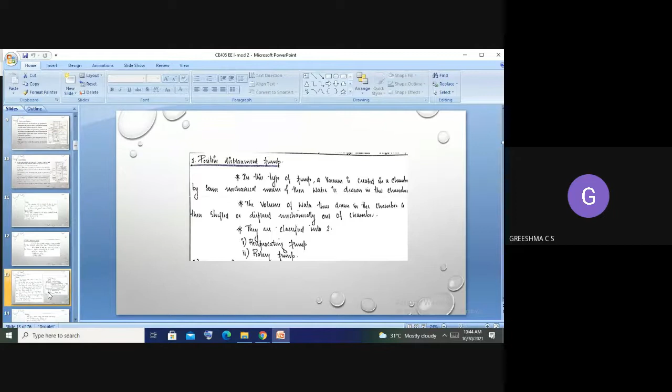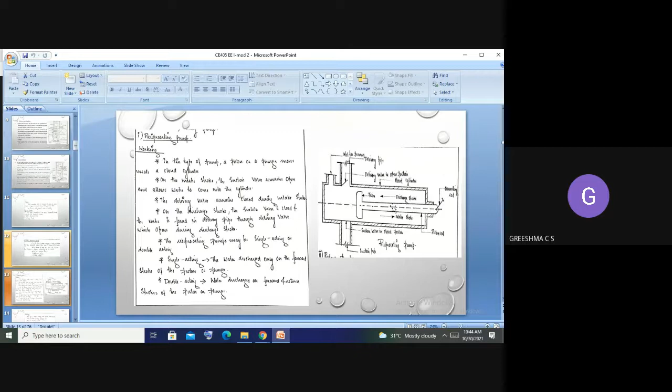Reciprocating pump, yesterday I showed you with the video how it is - a closed cylinder will be there, a plunger will be there. This plunger will be rotating, and by this rotation or movement the water will be passing through the cylinder. So that is reciprocating pump.

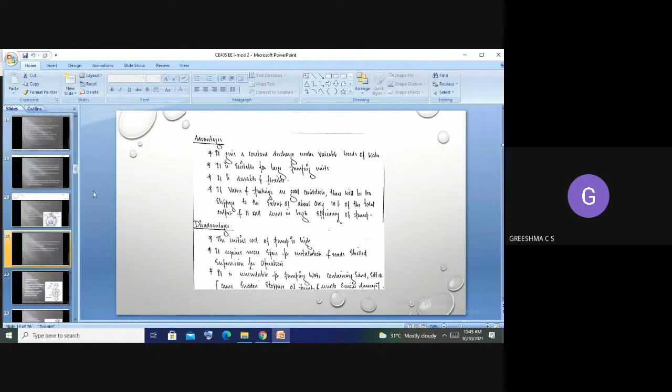After that I showed you the rotary pump. Rotary pump means you are having rotary blades, and these blades will be moving in opposite directions. You can see in this figure, the blades will be there moving in opposite directions, so water will be passing through between the teeth of these blades, and it will go to the discharge pipe. So that is rotary pumps.

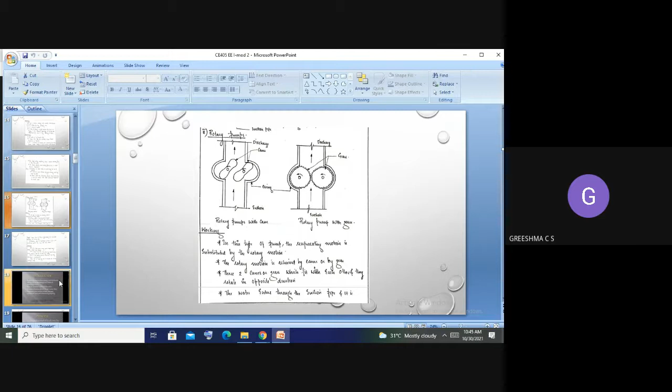Coming to the next category, that is centrifugal pumps. This you might have studied. So what do I mean by centrifugal pumps?

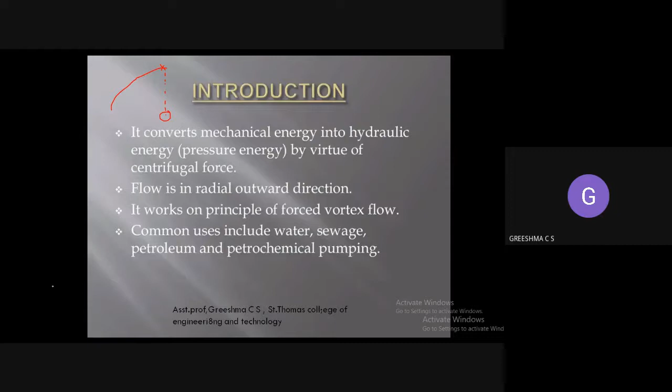As you're seeing right now, this is a centrifugal pump.

Now what's the principle of this centrifugal pump? The main principle is the forced vortex flow, which means that a certain mass of fluid is rotated by the external torque, and there will be a rise in the pressure head. What do you mean by forced vortex flow? It means a mass of fluid - imagine a liquid, I'll explain in simple terms - when the liquid is rotated with an external torque, there will be a rise in the pressure.

Due to this rise in pressure, the water will be flowing. This process is known as forced vortex flow.

This centrifugal pump mainly has two main parts: the impeller and the casing. The impeller converts the driver energy into kinetic energy, and the diffuser converts the kinetic energy into pressure energy.

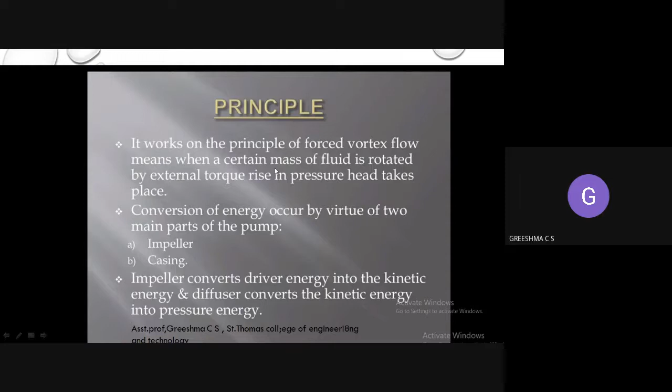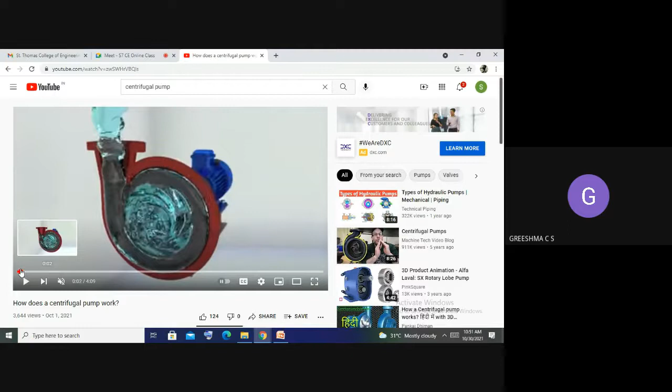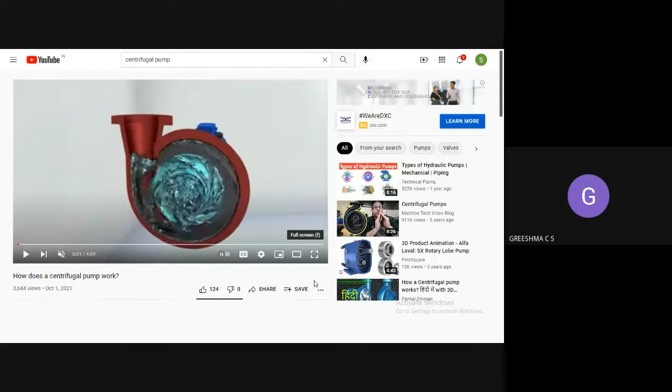So see this. Have you seen this? See. This is called the forced vortex flow.

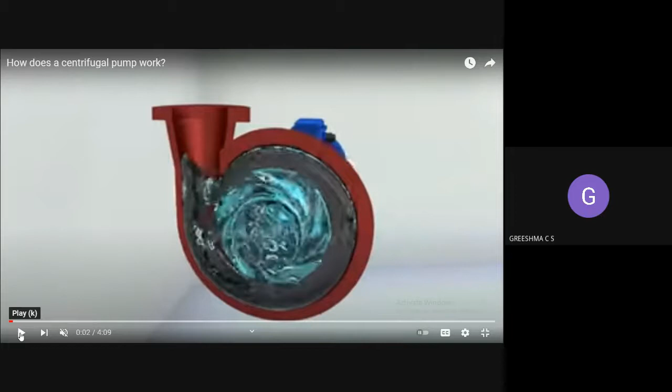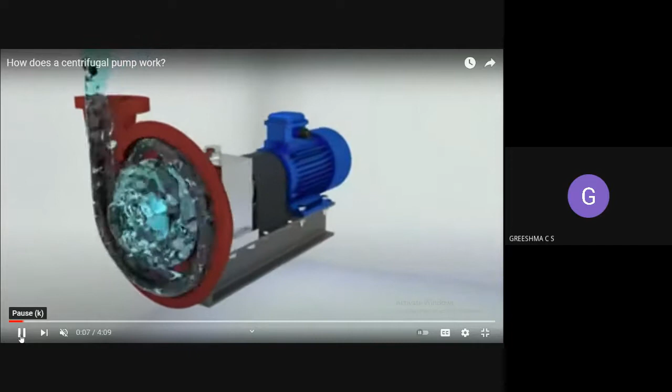As you can see, these are the vanes, which have plates, and water flows through these vanes. The water is rotated by the torque, external torque. You can see this in the video very clearly. This mass of liquid is rotated by the external torque.

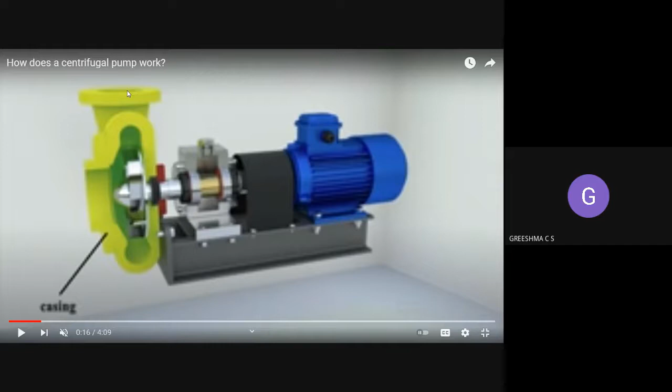When this external torque is acting on this mass of liquid, the pressure of the water will rise. Because of this pressure, the water will pass through the delivery pipe. This is the delivery pipe, as you can see here.

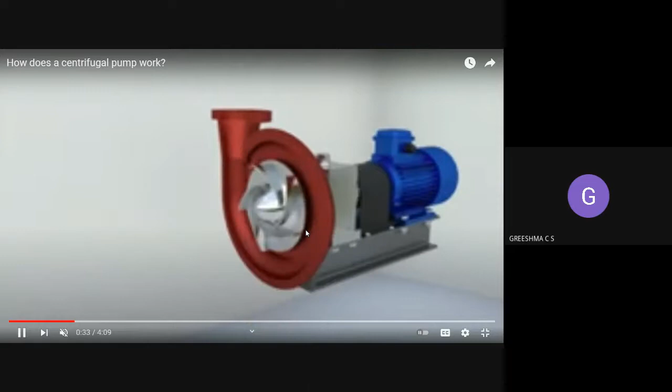So these are the parts of the centrifugal pump: this is the casing, this is the impeller, this is the shaft, this is the bearing. This is the exact picture of how the water is pumped through a centrifugal pump.

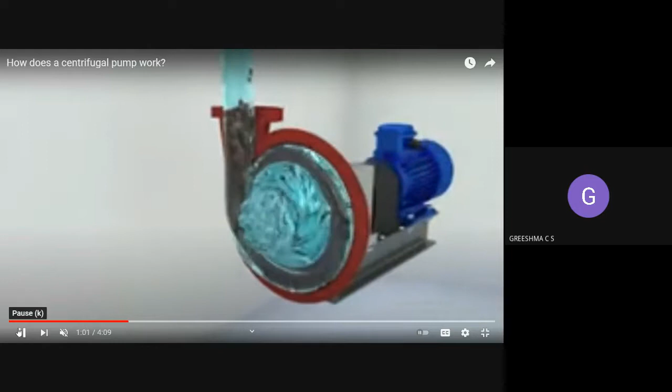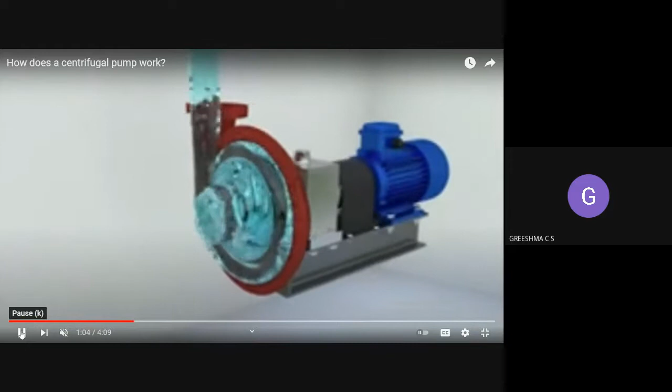Can you see this? Water will be allowed to pass through; there will be a pipe, a conduit over here. Water passes through this conduit, and here the impeller will be rotating, and water will be forced into this impeller.

The water is subjected to a centrifugal force as external torque is applied. You can see the water rotating. As the water rotates like this, the pressure energy of the water increases, and because of this pressure energy, water rises through the delivery pipe.

Okay, so that's about the centrifugal pump.

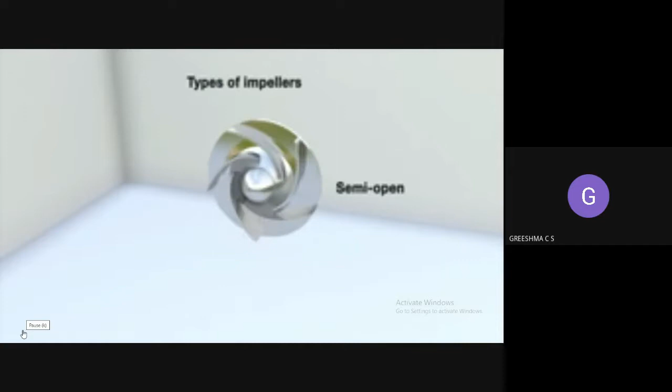See, it will be rotating like this. These vanes initially rotate like this, so water will pass through it, and then the water passes through this impeller, meaning water is subjected to a centrifugal force. The torque acts there, so the pressure energy of the water increases, and water passes through the delivery pipe. That's how it works.

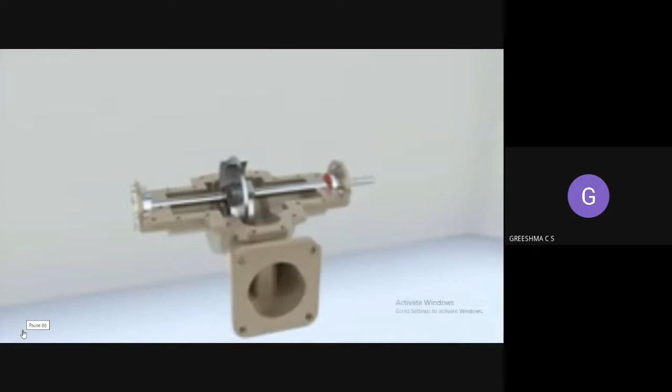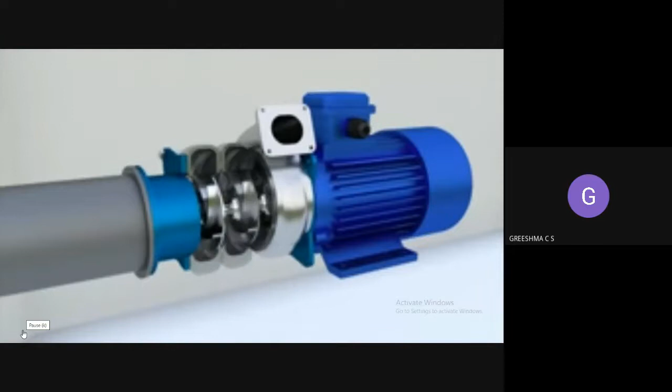See, this is the exact working of it. Here you can see the water is forced through here, passing through this pipe. The impeller is rotating, and this impeller forces the water through the delivery pipe. The water that comes to the delivery pipe will have high pressure energy.

See, this is how the centrifugal pump is pushing the water out. Okay, so through here water is coming.

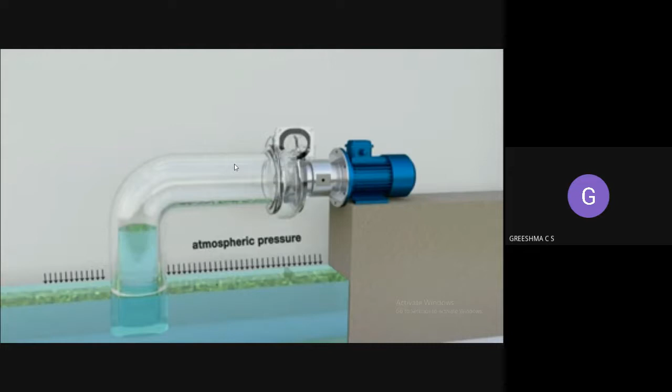So now we can go back to our slides.

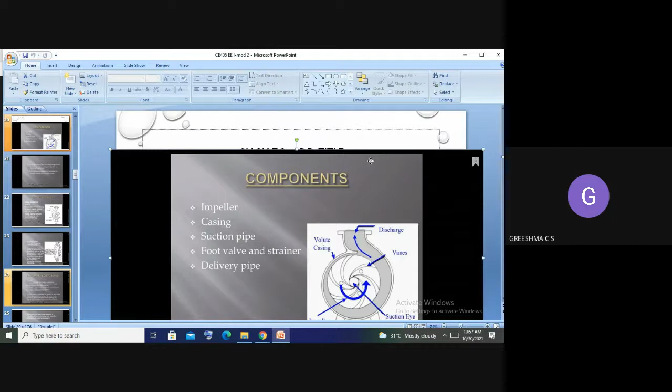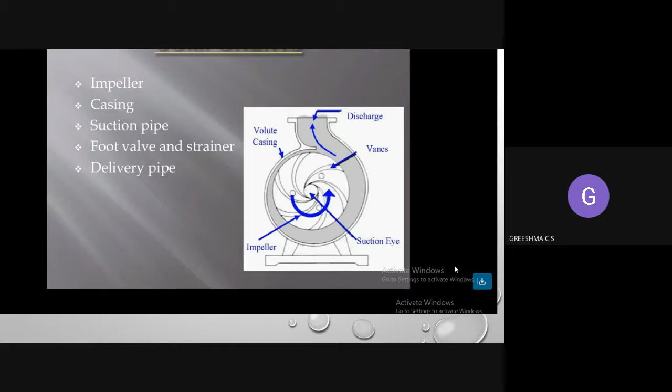Okay, so these are the different parts of the centrifugal pump. They will be having an impeller, a casing. Impeller is a rotating one, casing is the outer part, then a suction pipe - this is the pipe through which water is pumped, called a suction pipe. Then there will be a footvalve, a strainer, then a delivery pipe.

Now we have seen how the centrifugal pump is working. This is the cross section of the centrifugal pump - here is the inlet pipe, here is the outlet pipe. Water will be forced to the impeller through the inlet pipe, and the liquid will be rotating in the impeller, and then it will be going out to the outlet. So you have to draw this cross section if the question is asked.

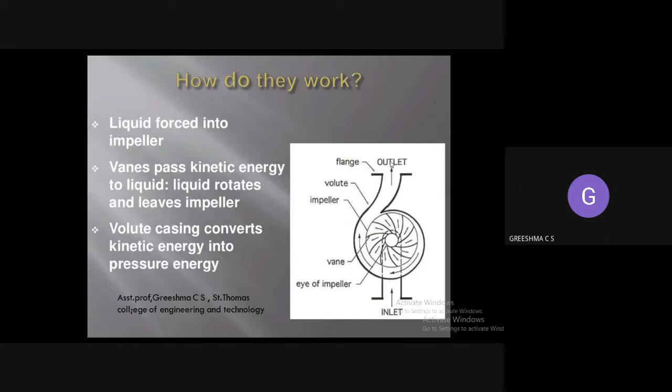Now coming to the casings - the main purpose of this casing is to convert kinetic energy into pressure energy. Casing means the outermost portion. You have seen in that video they showed you the maroon colored casing - that maroon color outermost box is called casing.

Now the casings are mainly of three types - volute casing, vortex casing, and circular casing. Volute casing is used for higher head, that is when the water has to be pumped to a very large height.

Now next one is the vortex casing. Here the eddy currents of the water will be reduced - that means the hydraulic energy of the water can be dissipated by the vortex. Water will be having a lot of hydraulic energy, eddy currents will be there, that is water will be pushing with hydraulic force. So that can be reduced using this vortex.

Next one is circular casing. Circular casings are used for lower height, that is when water needs to be pumped to a lower height. When water has to be pumped to a larger height, you can use volute casings. And if the water pressure energy is very high and eddy currents need to be reduced, in that case you can go for vortex casing.

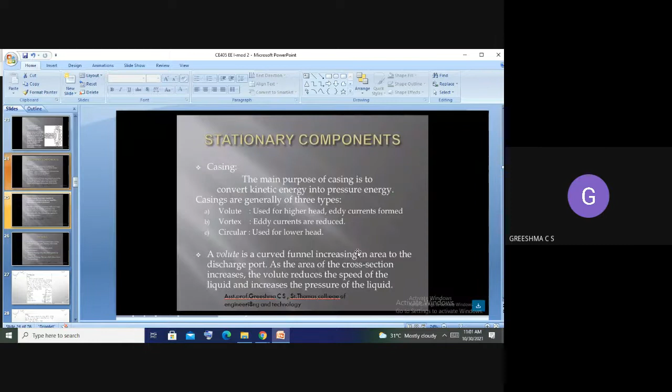Now coming to the different types of casing in detail. The first one is volute casing - it is mainly having a curved funnel shape which is increasing in area towards the discharging port. So as you go to the port, its area will be increasing.

As the area of the cross section increases, the volute reduces the speed of the liquid and increases the pressure of the liquid. So as the area of this discharge pipe increases, the speed of the liquid will be reduced, and the pressure energy of this water can be increased.

So what is the advantage of this? Water can be pumped to a greater height - a large amount of water can be pumped to a greater height if it has high pressure energy. In the volute casing, the area of the discharge port is large, so the speed of the liquid is reduced and pressure is increased, allowing the water to be pumped to greater heights.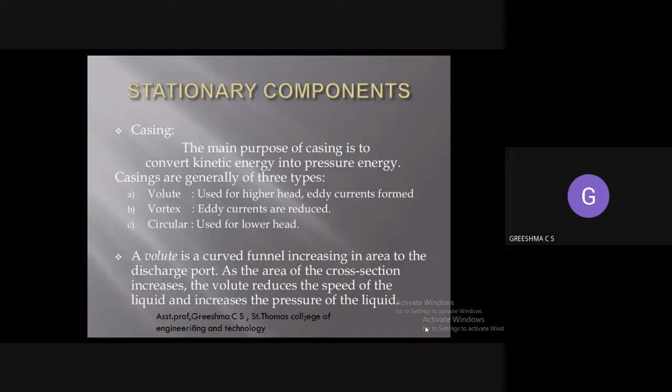Coming to the vortex casing - it has a circular chamber which is kept between the casing and the impeller. By this, you can increase the efficiency of the pump, mainly if you want to reduce the water currents or eddy currents.

If you want to reduce the eddy currents, you can go for vortex casing. Mainly vortex casing is not used for pumping water to larger heights, but here our aim is to improve the efficiency of the pump. That means a large amount of water can be pumped, and the efficiency of the pump can be increased. So that is the second case, vortex casing.

Coming to the third and last one, that is circular casing. This is a stationary diffuser vane that surrounds the impeller periphery, which converts the velocity to pressure energy. This circular casing basically has a circular shape.

This is kept surrounding the impeller of the pump. You have seen the impeller, the blade-like things, right? So it is kept over there. The circular casing surrounds the periphery of this impeller, and it converts velocity to pressure energy. Again, this is not used for larger heights or large projects.

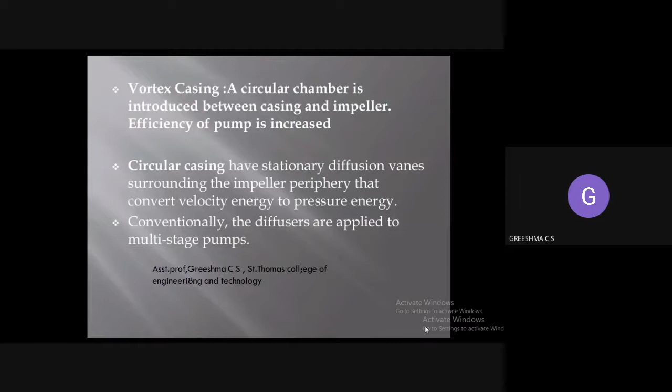Now another important term relating to the centrifugal pump is priming. So what do you mean by priming? Priming is nothing but filling the whole section with water.

It is the process of filling the suction pipe, casing, and delivery pipe up to the delivery valve with water. That means the suction pipe, casing, delivery pipe, everything is filled with water. That process is called priming.

Why you're doing it is mainly to remove the air content. In this video they have clearly shown you the priming process.

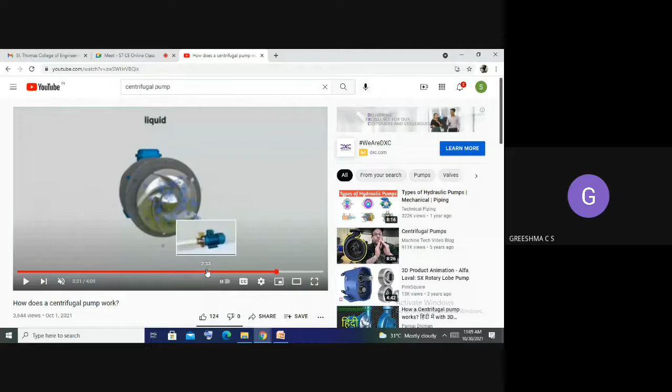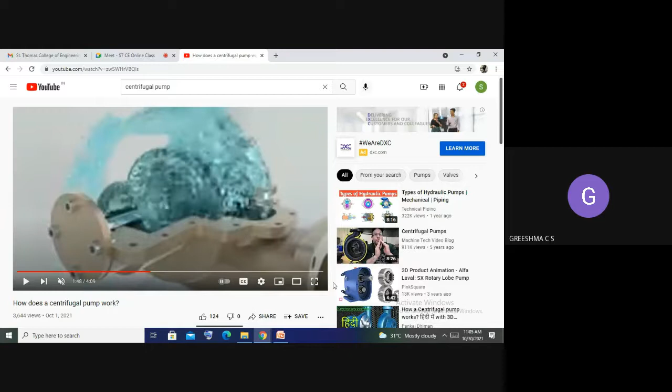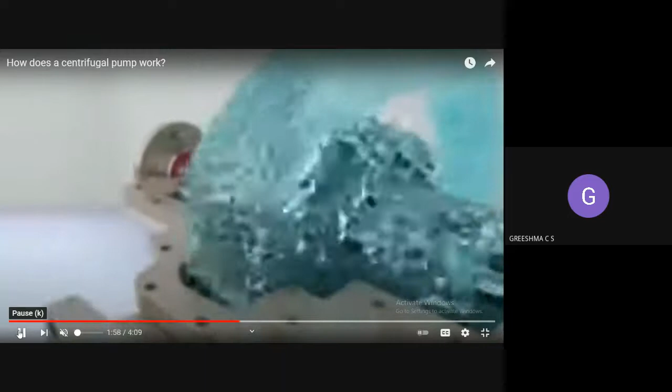See, this is the priming. Here you can see everything, the suction pipe, delivery valve, everything filled with water. The whole portion is filled with water. Can you see the suction pipe? That full chamber is filled with water.

The main advantage of this is that the air content can be reduced. If air is there, the efficiency of the pump will decrease. So the air content can be reduced, and that process is called priming. Again, I will show you one short clip of priming.

Here you can see priming. This is a suction pipe. Here the impeller is rotating, and because of that rotation, the water is suctioned inside.

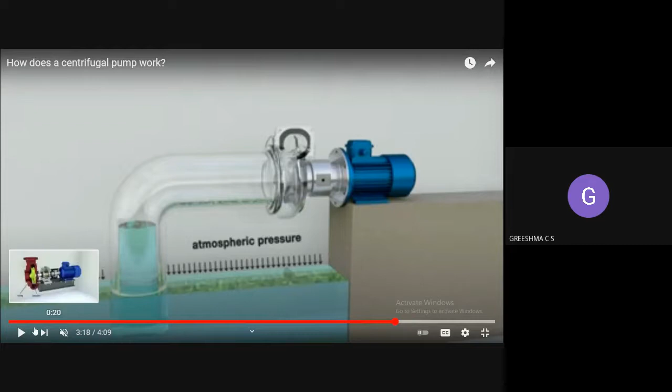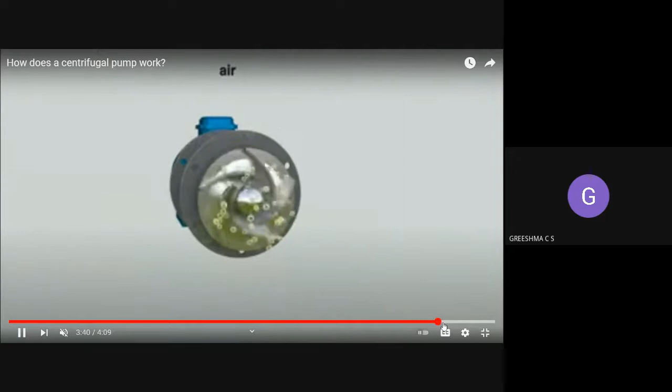See this, this is the exact picture of priming, how it is occurring. Everything from the suction pipe, through which water is entering by the action of suction, to the delivery valve, all these things are filled with water. This process is called priming.

Priming is one of the most important processes involved in the centrifugal pump. The main objective is to remove the air content, to improve efficiency by removing the air content.

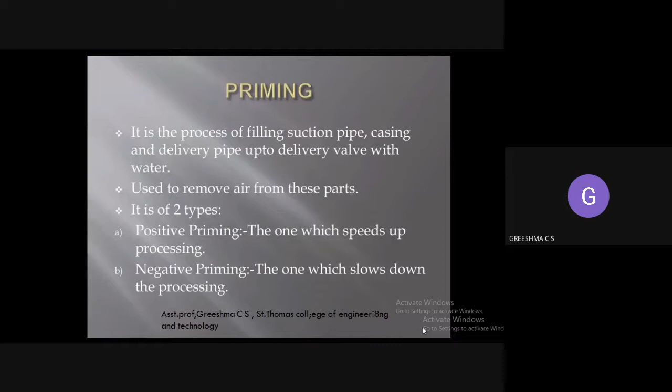Priming is mainly of two types: positive priming and negative priming. Positive priming means it speeds up the pumping process. If the priming reduces the process of pumping, it is called negative priming. Anyway, that portion is not much important to us; in priming, that term is important.

Okay, so that's about the centrifugal pump.

One of the disadvantages of the centrifugal pump is that when water is being pumped, if the pumping is suddenly stopped, the water will move in the backward direction. That's one of the main disadvantages of this centrifugal pump.

The remaining advantage is that it is very useful because you can pump water to different heights. So you should study this cross section, which is very important.

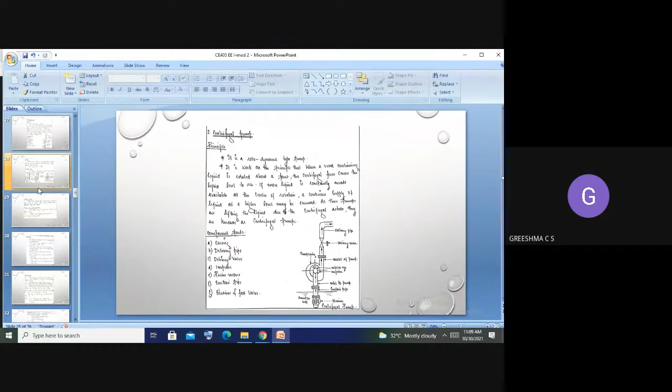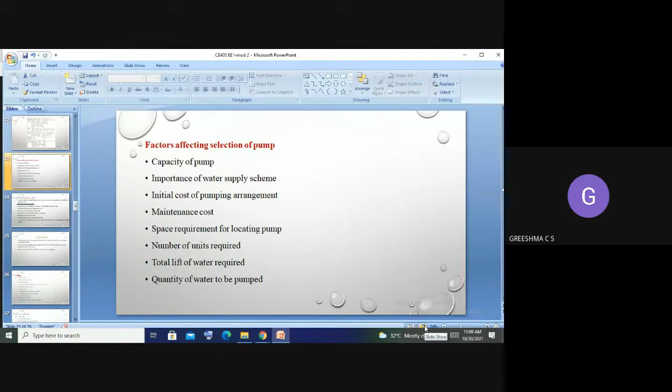Coming to the next portion, that is the factors which are affecting the selection of the pump.

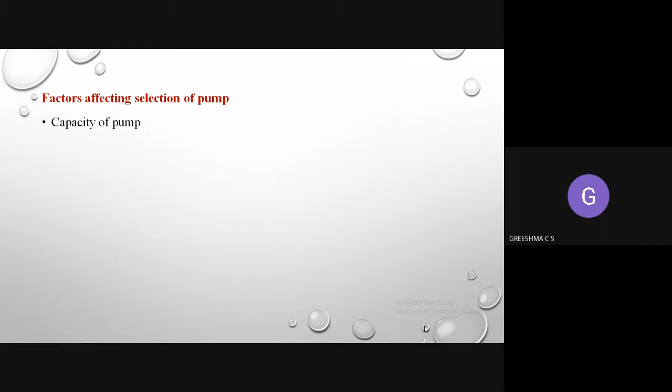The first one is capacity of the pump, that is how much water a pump can deliver. Depending on that, you will be choosing the pump. If you want to go for larger projects, a large amount of water has to be pumped, so you have to select a highly efficient pump which can deliver water to large heads. So capacity of the pump is very important.

The second one is the importance of the water supply scheme. How important is the water supply? Sometimes it will be a continuous water supply, sometimes there will be intermittent water supply. Based on that, you will be selecting the pump.

The third one is initial costing. Cost economy is very important. Apart from efficiency, economy, everything should be within the budget. The initial cost for some pumps is very high, so that is also another factor which leads to the selection of the pump.

Next one is maintenance. Once you have seen the whole arrangement - yesterday I showed you a pumping station of Rajasthan, how big the pumping station is - a lot of engineers and workers are involved, so maintenance is very important. It continuously requires maintenance. Based on the maintenance pattern, you need extra labor. Someone has to monitor it 24 hours, so maintenance is very important.

Next one is space requirement for locating a pump. You have seen yesterday the pumping station of Rajasthan - that space location is very important. Some pumps require a larger area, some require a lesser area. The number of units required is again related to space only.

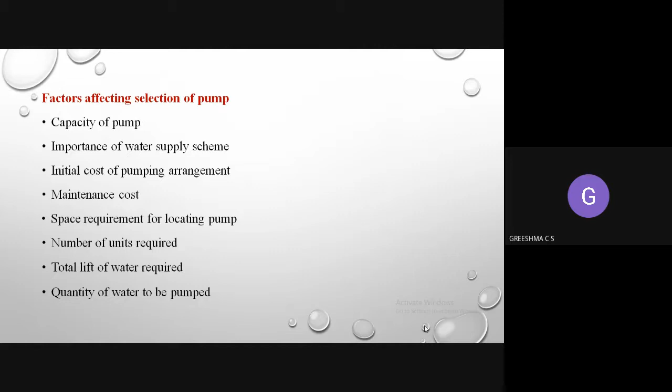Location of the pumping station - that is very important. How to locate a pumping station? Location depends upon the place where it is to receive water, and the place where it has to supply water.

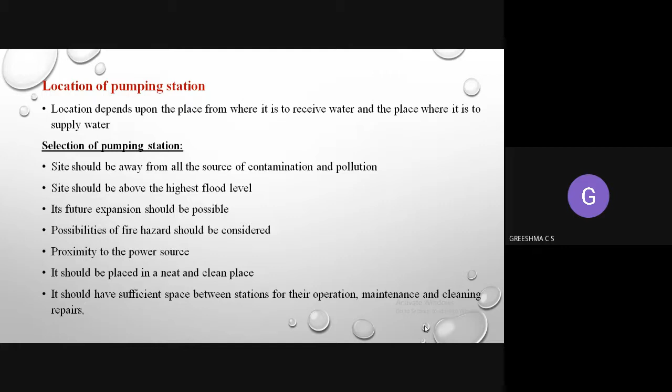Pumping station means the place where all the pumping process is occurring, that is called the pumping station. Where to locate this pumping station depends upon the factor of where the water is received from, and to where the water is supplied.

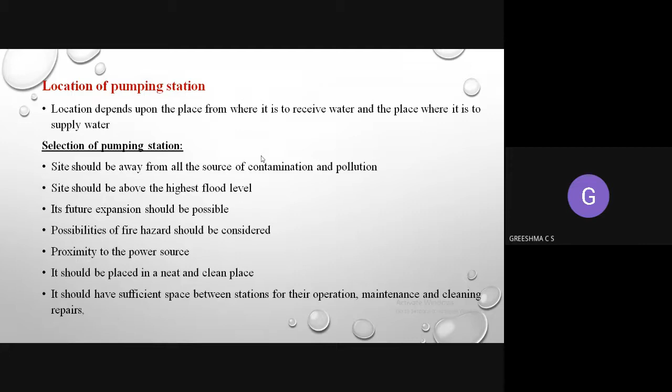So that's about the pumping station. Next, we move on to conveyors.